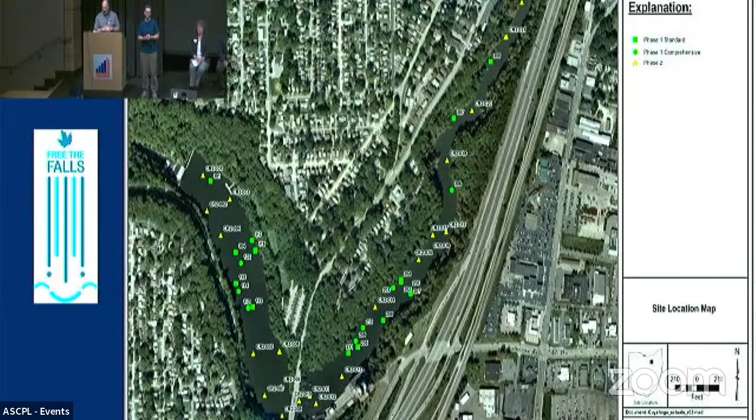So it allowed us to now think and partner with US EPA. In 2015, Ohio EPA was able to fund our first study, and for some folks, we had our really first serious meeting in 2015 talking about this as a possibility. And we came up with a cost at that time, I believe it was $77 million we thought it would be. We had a meeting, and as time has gone on, obviously those things have changed. But we continued forward because we had both P's: we had patience and we had these partnerships building up.

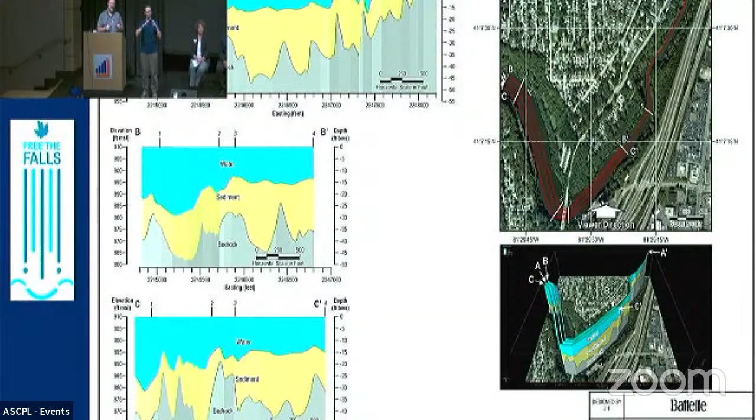As we moved forward, we started asking very seriously, how do we achieve these things? So last year, we were able to go to the US EPA office in Chicago and make our pitch: hey, we got a cool project here.

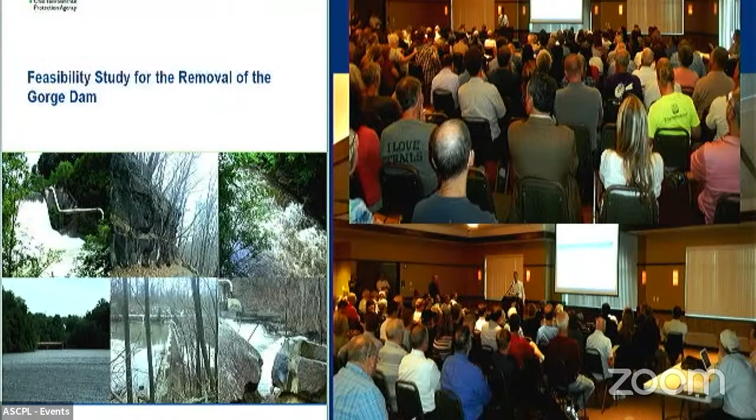How much do you really want to partner with it? We did an application, it was reviewed, and where we are is our partners. We want to make sure we understand that none of this is possible without a common vision, which is: let's invest in the river and make it better, restore that river. For that, the city of Cuyahoga Falls, the city of Akron, Friends of the Crooked River, and Gary Whidden were at the very beginning of asking this when it was still something that most folks would call a pipe dream, along with Summit County Metro Parks, the County of Summit, the Lake Erie Commission, and Lynn Garrity.

Without her emotional support, I think I would have buckled years ago.

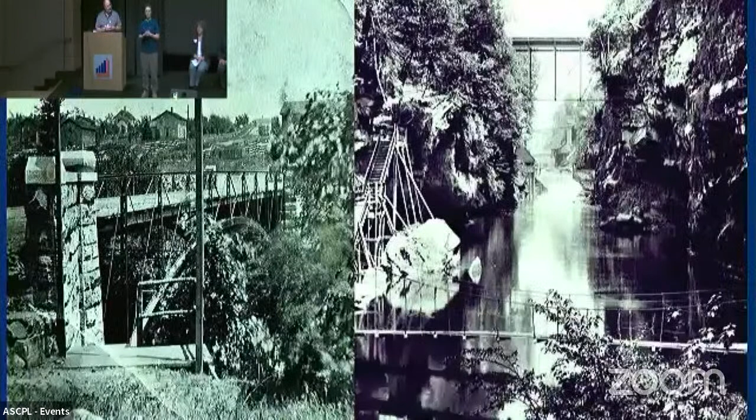Ohio EPA, the state of Ohio, FirstEnergy, the Regional Sewer District, and the US EPA — without this collective partnership, nothing would be possible to move forward. So with that common vision and investment, it is my honor to say, as of right now, we have a signed project agreement, and this project is able to move forward. Our partners have come together and funded it.

I'm wearing my When Pigs Fly socks because Steve Tuckerman and Bob Wyszynski, the folks who mentored me, that would have been their answer had we asked this question 30 years ago.

It is amazing to think of the work that has been done, and even more amazing to think of the work that will be done, and all the support folks have given us to encourage this project to move forward, to restore the Cuyahoga River to what was once the most visited natural area in the state of Ohio. With that, I am going to introduce Mayor Horrigan, who's going to give some additional remarks.

The name Bill Zawiski lives in memory for a lot of reasons, and for a good reason too, because early on, and not to give you a history lesson, but as we've had these — go ahead. That's twice, it's okay. I think I can pick back up.

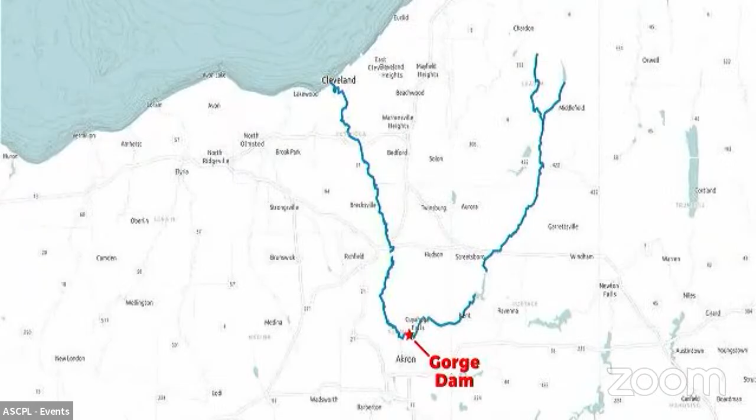Flowing southwest from its headwaters in Geauga County, the river encounters a large deposit of bedrock in Cuyahoga Falls, forcing it to make a sharp U-turn before finishing its journey to Lake Erie. With rocky outcrops, caves, and dramatic scenery, the area where the river turns towards the north has attracted visitors for more than 150 years. Outdoor enthusiasts once flocked to the gorge to view the big falls of the Cuyahoga and to enjoy the amusement park rides, dance halls, picnicking, and more. That tradition continues today at the 155-acre Gorge Metro Park.

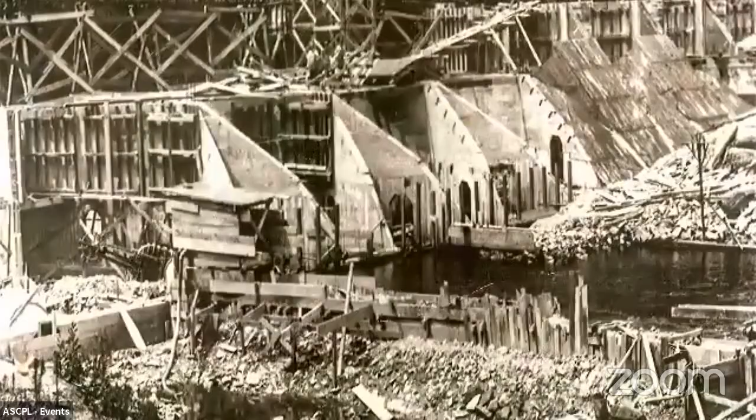But over the years, the river has faced serious challenges. In 1911, the massive Gorge Dam was built to support electricity generation for streetcars and city lights. Its construction put the famous Big Falls underwater and forever altered the landscape of the gorge.

In the 1950s, the Cuyahoga had become a virtual sewer. As the region industrialized, the river became extremely polluted. Like other rivers around the country, the Cuyahoga between Akron and Cleveland became a convenient dumping ground for raw sewage, industrial waste, toxins, and polluted runoff. Thanks to the Federal Clean Water Act and the entire Cuyahoga River community, the river has largely recovered from its polluted past. But the Gorge Dam remains.

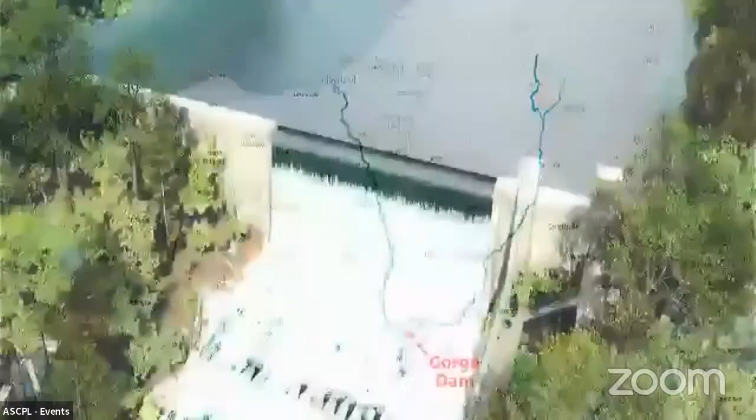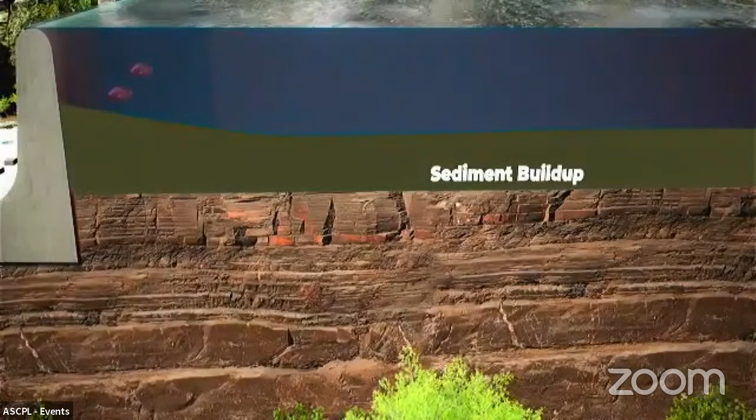Today, the 58-foot-high, 425-foot-wide remnant of the past serves no useful purpose. In fact, the dam is the only thing standing in the way of a completely free-flowing Cuyahoga River from Kent to Lake Erie. Even though dams were built with good intentions, they cause a lot of problems for water quality. In addition to preventing fish from traveling freely, dams affect the dissolved oxygen, flow, and temperature of the river. They also reduce habitat, trap and concentrate sediments and toxins, and alter the food web of the dam pool.

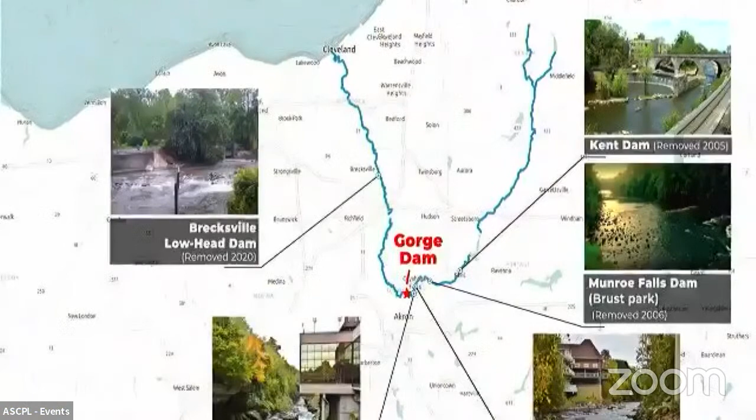Five other dams have already been removed on the Cuyahoga, resulting in nearly 10 miles of restored river. And what's good for the fish is also good for the people. These projects helped improve quality of life and drive economic development along the riverfronts in these communities over the past 10 years. That's why a large group of community partners have joined forces to free the falls at Gorge Metro Park.

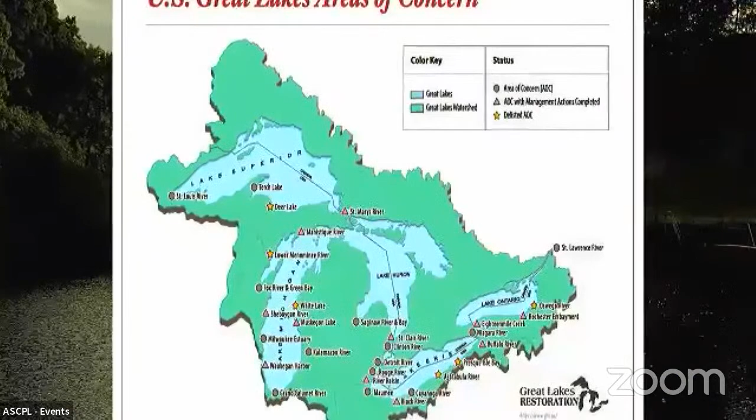US EPA intends to fund the majority of the project through the Great Lakes Restoration Initiative, and non-federal funds will also be required. A funding plan for sediment remediation, construction of the sediment disposal site, dam removal, and restoration of the dam pool is in progress.

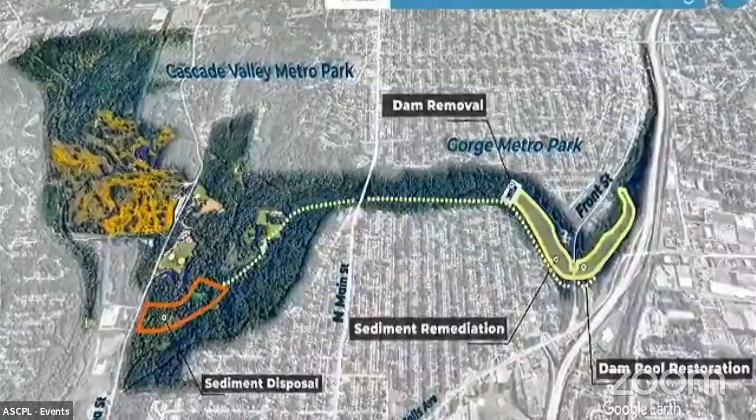Meanwhile, the City of Akron's ongoing sewer system upgrade requires construction work in the same area. While both projects are being carefully planned and coordinated to minimize disruptions to the public, there will be park and trail closures over the next several years. Although the result will be worth it, taking down a dam this big isn't easy. So how will we do it?

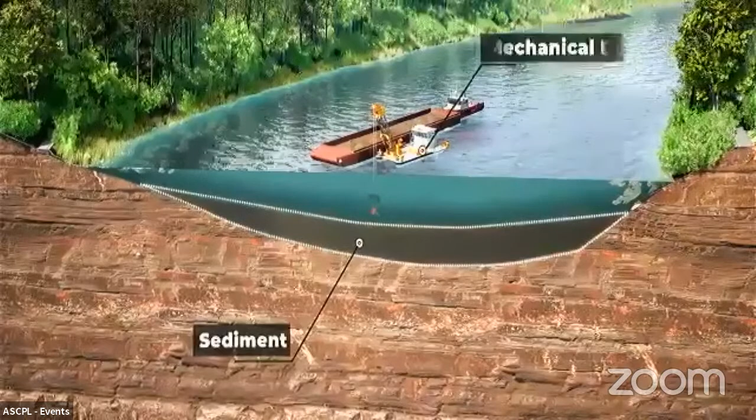First, nearly 1 million cubic yards of sediment must be removed from behind the dam. The sediment has been collecting for 100 years and contains pollutants consistent with the area's industrial past. A mechanical dredge system consisting of a clamshell bucket, crane, and scow barge will troll the reservoir, slowly removing sediment scoop by scoop. This work will likely be completed over 2 construction seasons.

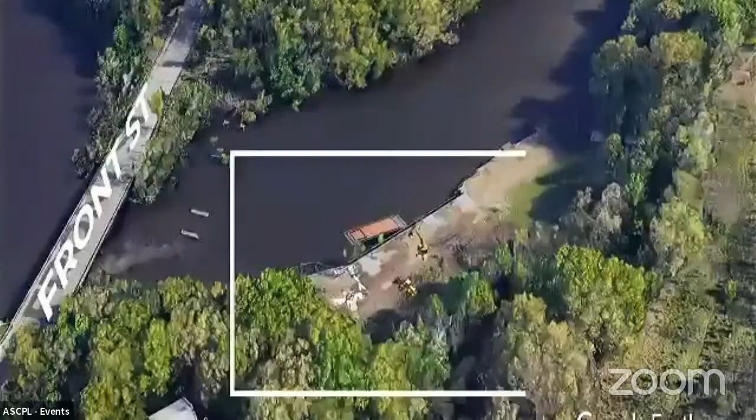Each full scow barge will then be unloaded at a staging area where it will be screened to remove any large debris. The still wet sediment will then be pumped through a temporary pipeline under the Front Street Bridge and then alongside High Bridge Trail. It will continue under the high-level bridge at North Main Street to the Chuckery area of Cascade Valley Metro Park, about 2 miles from the dam.

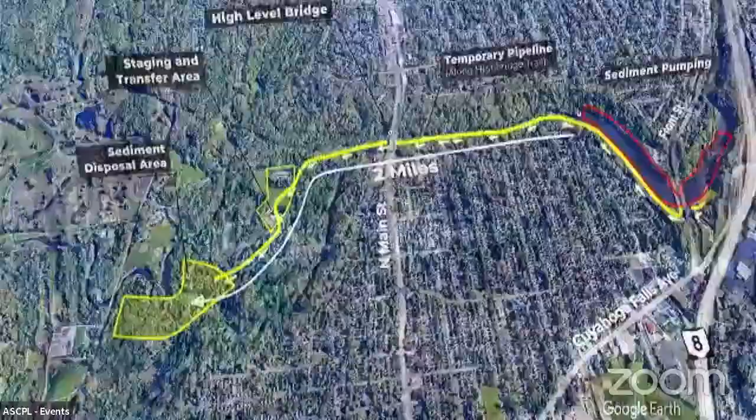The Chuckery area was historically a dumping site and will be utilized as the permanent disposal area for the contaminated sediment. To make room to store the sediment and concrete mixture, trees must be removed from a portion of the Chuckery area. The sediment is mixed with concrete in the pipeline to form a more solid material that can be contoured before it is fully stabilized.

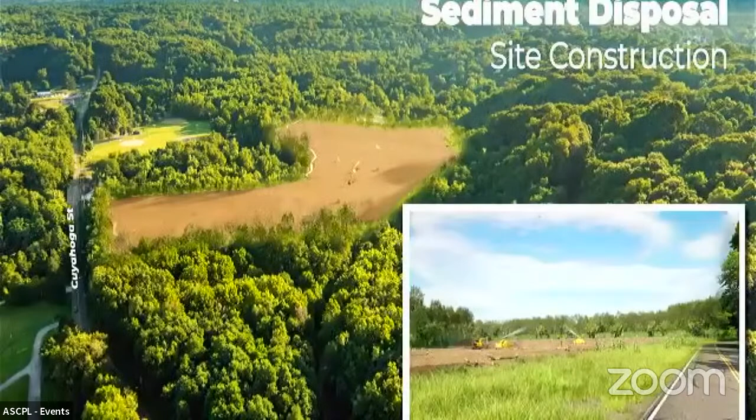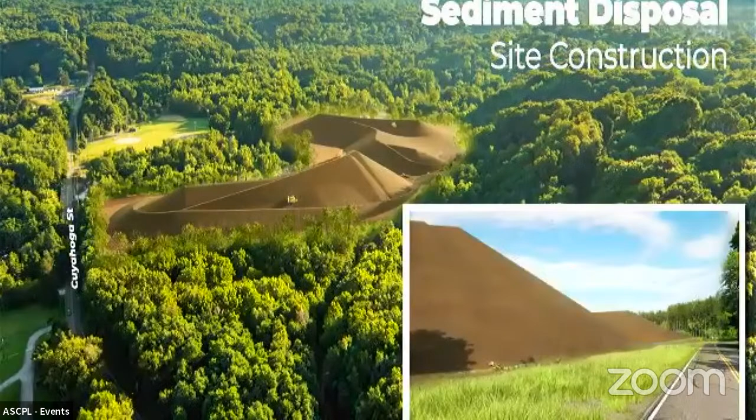This is an innovative and safe approach that has been used at sites across the country. The disposal area is designed to ensure permanent stabilization of the sediment mounds, minimize impacts to buried utilities, and appropriately manage stormwater.

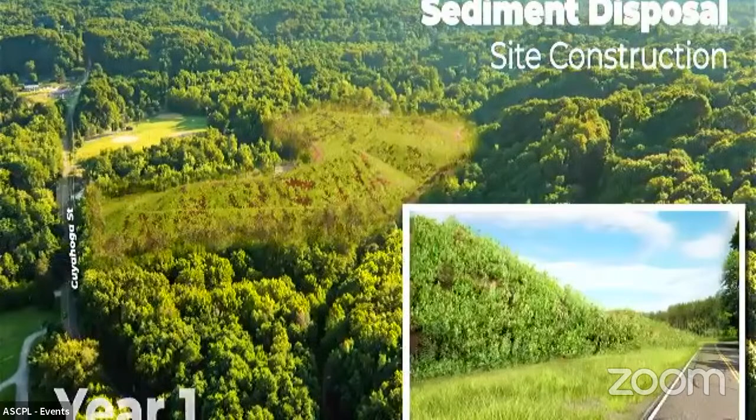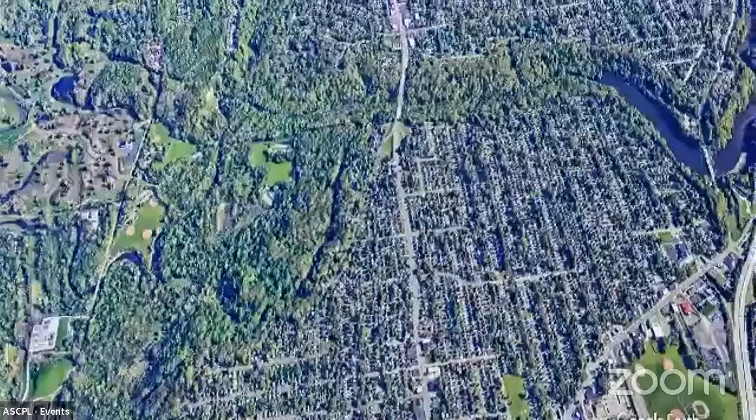After final grading is complete, the sediment mounds will be capped with soil and the area will be planted with a native mix of trees and vegetation, and contoured to look as natural as possible. Within about 10 years, the final conditions will result in a biodiverse habitat that will complement the natural beauty of Cascade Valley Metro Park. Next, the dam itself will be removed.

The water level of the reservoir will slowly drop as the dam is dismantled. The dam will be deconstructed using a barge-mounted excavator. To lessen the impacts to the area and to reduce costs, it may be possible to remove only the center spillway and exposed piping of the dam.

If left intact, the remaining sections of the dam could then serve as a cultural resource and potentially be repurposed as a river overlook for park visitors.

The final step of this project will be to restore the river corridor to its natural state with a rocky channel and vegetation that will promote a healthy river ecosystem.

Restoring the original grandeur of the gorge is our region's path to a vibrant future for the health of the river, its watershed, and its people. That future will bring clean water, natural beauty, recreational opportunities, educational experiences, and economic development.

This project has national significance and is supported by more than 50 agencies, businesses, and civic organizations, as well as the public. Dam removal is critical to restoring the Cuyahoga River and completing a recovery decades in the making. From our industrial roots flows a new future, one that carries Summit County forward while honoring our rich history. The result will be a healthy, free-flowing Cuyahoga River for all to enjoy.

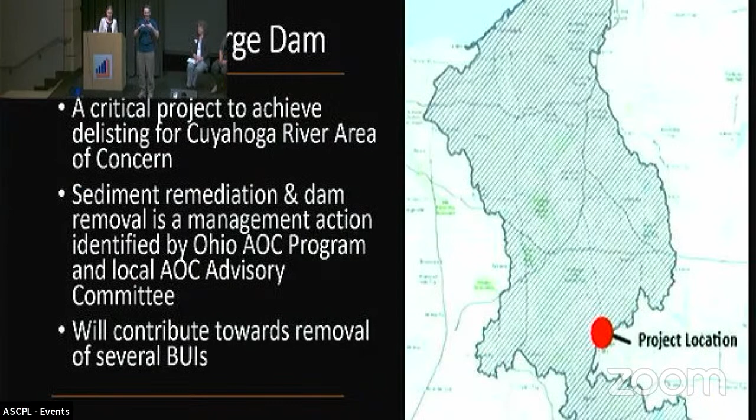I'll go over the remedial approach and then cover some additional work that's happening on the site within the next few months. Some exciting news: there's actually groundbreaking regarding the project within the next upcoming months. And of course, I'll highlight project partners, because we wouldn't be here today if it wasn't for everybody. Then I'll touch a little bit on a tentative schedule looking forward and when we can expect this project implementation to begin.

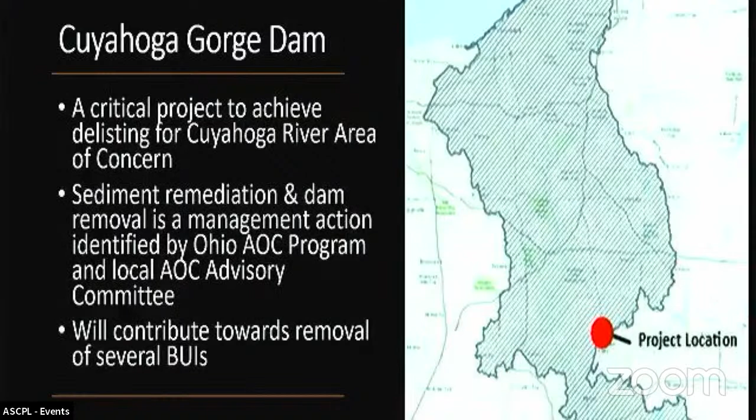So this project, the gorge dam removal as well as the sediment remediation piece, was chosen as critical by the Ohio AOC program and the local AOC advisory committee. These projects together will address several beneficial use impairments that have been determined as impaired within the area of concern, and addressing those impairments will ultimately lead to delisting the area of concern.

So that's how this project falls within the area of concern for Cuyahoga. Now, why do we have to remove the sediment? There's a lot of sediment here, close to 900,000 cubic yards, as Bill mentioned. We aren't able to just remove the dam and let all of that sediment flush downstream. So either way, regardless of the contaminant levels within the sediment, we'd have to figure out where to put this.

But because of sediment characterization and sampling that has occurred previously, we've determined there are some contaminants within the dam pool itself. When I say dam pool, that's essentially about 1.5 miles upstream of the gorge dam. You can see in that figure, and I have another one that shows the footprint better, that within that dam pool the sediment thickness varies anywhere between 1 to 34 feet. So there's a lot of sediment there that needs to be removed.

And within that sediment there's PCBs, PAHs, oil and grease, and heavy metals, but at low levels. Something that Bill had mentioned, he called it the 'ick' within the material.

I want to emphasize this because it's important. The contaminants are at a level where we need to address them, dispose of them, and handle them appropriately to remove human health risk as well as risk to fish and wildlife populations. But the good news is they're not at as high a level where it's necessary to categorize them as hazardous waste or waste that needs to be treated under TSCA or RCRA, which are regulatory programs. So it's dirty enough or icky enough material that we need to dispose of and handle it properly, but not icky enough to be categorized as regulatory or hazardous.

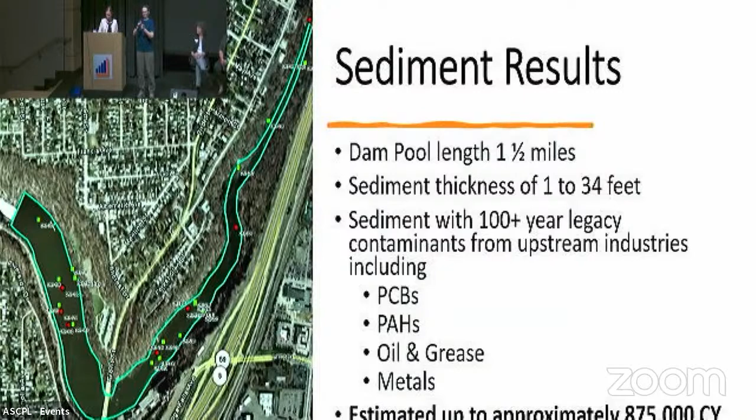The video did a great job walking through all of this, but I'll go through it again. This is showing the remedial action footprint, and there are some key components on this figure I'm going to point out. The main point is this shows where we're taking that dredged material and where we're placing it.

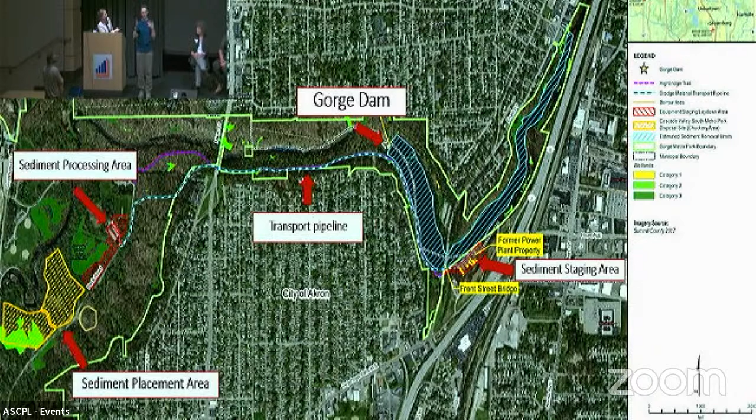So the dam pool itself, this is where the dredging is going to occur, is that area in light blue, 1.5 miles upstream of the dam itself.

As shown in the video, this is going to be mechanically dredged. There's essentially a clamshell bucket that's going to go in, get lowered, and bucket by bucket that material will be removed, placed on a barge, and that barge will go to the sediment staging area, outlined in red here, where the former power plant used to be. From the barge, the material will be removed, placed in the sediment staging area, the larger debris will be screened, and the dredge material will then go into temporary pipelines.

The pipes themselves are about 8 inches in diameter. There will be 3 of them, 2 active and 1 on standby. As the video mentioned, the pipeline route is going to go from that sediment staging area under Front Street Bridge, along the Highbridge Trail. You can follow the dotted light blue lines across, approximately 2 miles that these pipelines will run. There will be booster pumps in between to help keep that dredge material moving until it gets near Peck Road, where the Cascade Valley Park and the Chuckery area lead to the sediment processing area.

In the next slide, I'm going to go into a bit more detail on what happens there. But from the sediment processing area, the now-stabilized dredge material gets placed within the sediment placement area, which is the area outlined in orange.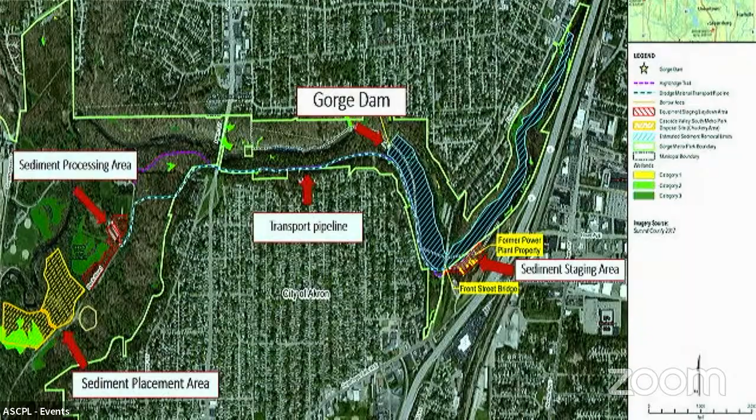This figure is showing just another example of the aerial image from before. We have the Gorge Dam pool, and then we have the barge. The material gets placed up there by the sediment staging area, or the former power plant, and gets placed into this large shaker, where the larger debris is removed. Large debris is then transported to a predetermined, designated landfill.

This is the pipeline route along the High Bridge Trail, and this is the sediment processing area, the label that was in red on the previous slide. I want to talk about that for a minute because it really is a key part of what makes this remedial approach exciting — it's a new technology being used for the Great Lakes Legacy Act program.

It's not new worldwide, it's been used for other projects, but it's new to our program. The benefits, and why this alternative approach was chosen over others, is because of the limited space we have within the Chuckery area. So I can jump to this slide to give a sense of the area we're working with.

This is the sediment process, or sediment placement, area. This is where the dredge material is going to get placed. Given the location, we have a Category 3 wetland to the top, there's a river, a road, and another road. So we're really limited on space.

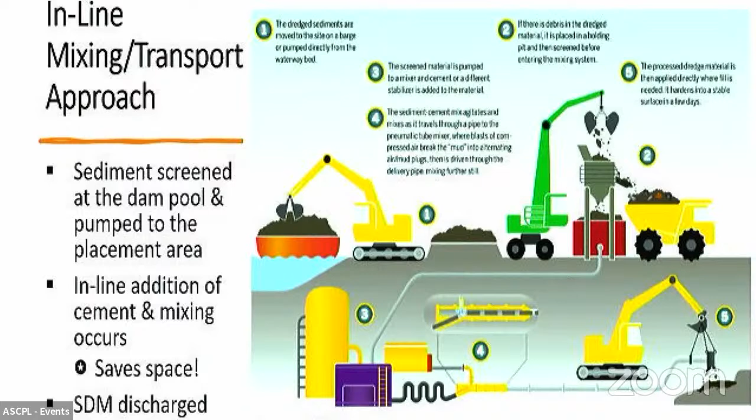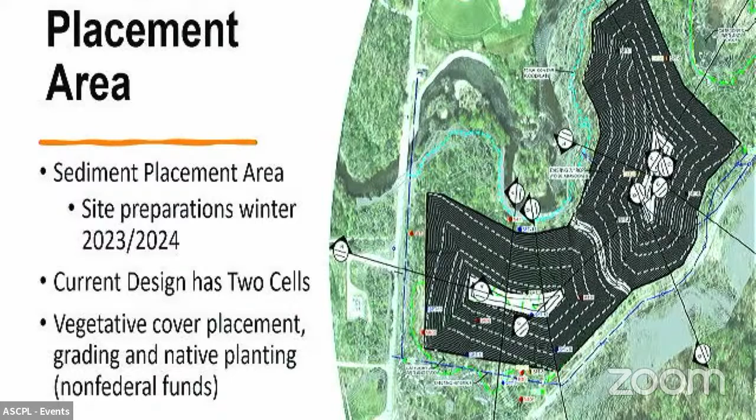If you take anything away from this, it's that the stabilization solidification system saves space, and that's why the remedial approach was chosen. As mentioned, this is the sediment placement area. I'll cover it more on the next slide, but there are a few projects occurring in the next few months, and this is the location where one of them will occur. Preparations should begin this winter, 2023 and 2024, to prepare the sediment placement area for the construction contractors once they get on the ground, hopefully spring or summer of next year. That space will be ready for material to be placed there.

Right now it's a two-cell design, and around the perimeter there are stormwater ditches, plus one running through the middle. As the video showed, the cover of the sediment placement area itself will use native material. A native seed mixture will be planted on top, and it'll be contoured so it looks similar to the nearby habitat as well.

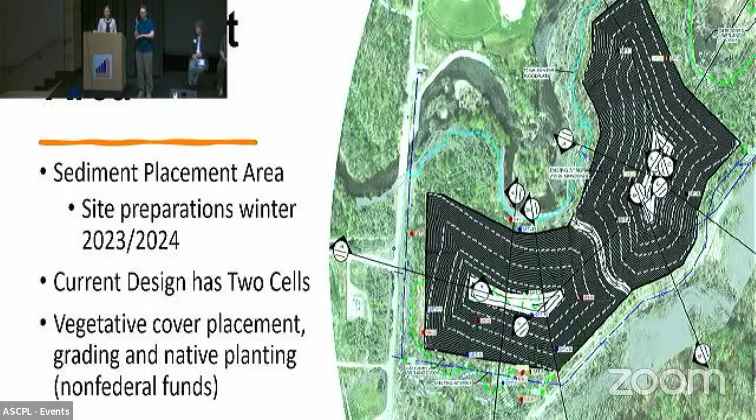Those additional projects I mentioned: the sediment placement area — the City of Akron, with funding from Ohio EPA, is going to begin work this winter, 2023 and 2024, to prepare that site.

In addition, this might be an area you'll be able to see from Front Street Bridge — the former power plant space, which will be the future sediment staging area. If you go past Front Street Bridge now, you can see a lot of metal left over, remnants of the power plant itself, including sheet pile wall. All of that isn't stable enough for the dredging contractors to work on, or for us to have that staging area in place.

So there's going to be work occurring again over 2023 and 2024 so that it's ready to go come spring and summer when the remedial action contractors are on board. It'll be complete, and that is also being led by the City of Akron through Great Lakes Restoration Initiative funding.

Also something you might notice from Front Street Bridge: tree clearing is taking place just to the west of the outfall from Front Street Bridge. The reason for this is because the construction contractors are going to need access to the dam pool upstream of the dam, and a lot of their equipment is too tall to go under the bridge.

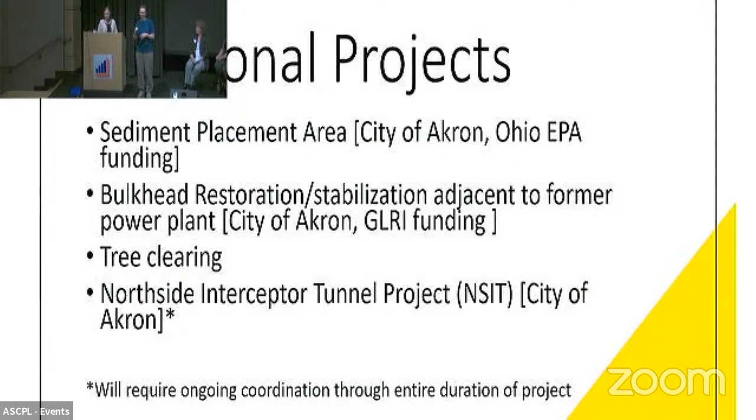Another huge project that is occurring, and we are sharing the same footprint, is the Northside Interceptor Tunnel project. The City of Akron and US EPA will be working very closely the next two years as we share that space.

I know there's been a lot of talk tonight about partnerships, and I know that probably seems like it's said a lot, but just looking at a project of this size, not only with the volumes that need to be removed, but the money that's needed to do it, this really wouldn't be possible without these partnerships. I just want to give a big hats off to a lot of the folks that have been working on this for a long time to get it to this point. It takes a lot of phone calls, a lot of meetings to have this list of folks. Just want to emphasize that it takes a lot of work, and I'm really happy to be a part of this great community and partners working on the Gorge.

So the difference is: there are the non-federal sponsors. We have Ohio EPA, City of Akron, Northeast Ohio Regional Sewer District, and the FirstEnergy Ohio Edison Company. These are the non-federal sponsors, the signatories of that project agreement that we're celebrating today. Within that project agreement, they have cash and in-kind contributions that they are committing to for this project.

In addition to that, there are also cost share partners. We have Ohio Lake Erie Commission, Summit Metro Parks, City of Cuyahoga Falls, as well as Summit County. All of these partners have also contributed cash and in-kind services to get this project done.

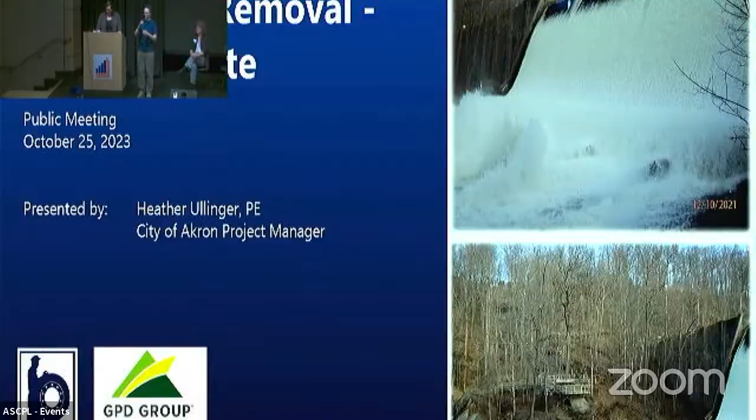How close do I need to be to the microphone? Okay, I am not used to talking with the microphone.

So my presentation tonight, I'm going to go through a design update, including information on access and staging, the dam removal itself, and then stabilization of infrastructure in the dam pool. By infrastructure, we mean Front Street Bridge, and our next steps for the project, and then a quick mention of the Northside Interceptor Tunnel project. You may have seen my posters out in the lobby, so I just wanted to make a quick mention of how that project interacts with this one.

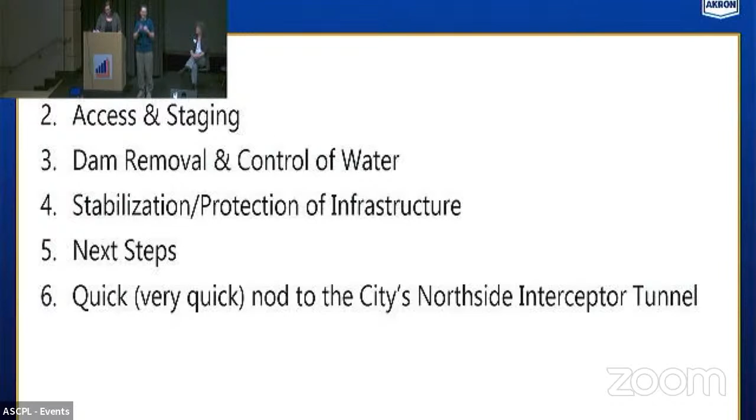So our design actually includes removal of the concrete structure. And like I said, we're also looking at stability of infrastructure within the dam pool. So we're looking at Front Street Bridge, we're looking at storm outfalls and what happens as the water level is lowered. At the end of our design, we'll also be looking at river restoration, what needs to happen to the river, if anything, once the dam is down and once the water level's lowered.

Our project team is led by GPD Group with assistance from AECOM and GEI Consultants. Our funding is through US EPA's Great Lakes Restoration Initiative program. So right now we're at 50% design. In the coming months, we'll be moving to 90% design. So the slides that I'm showing tonight are based on the 50% design. That means that it's not necessarily final and that things could still change.

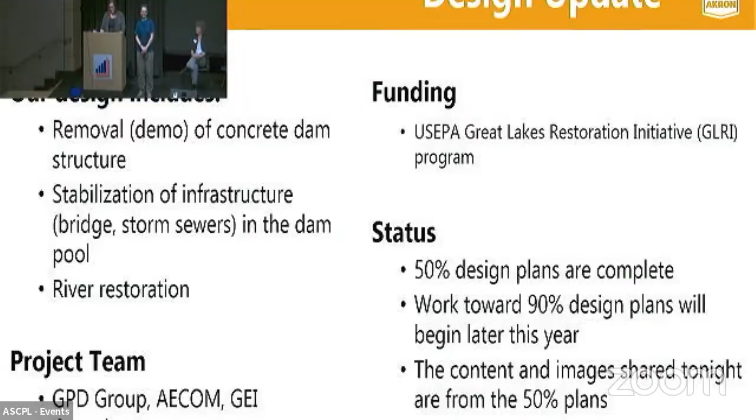So starting off with one of the most challenging aspects of our project is access. We need to be able to get from Front Street to the dam. And you'll see a lot of green areas - those are our proposed staging areas. The reason that we have so many is because as we lower the water level, we'll be changing the whole site. We'll be gaining land and we'll be reducing the amount of water, so we need access on both sides of the river.

We need access through the river. Starting on the north side of this figure, Gorge Metro Park main parking lot is one of our main access areas. We'll be using the lower Gorge Trail, widening it slightly so we can get trucks and construction equipment to the north side of the dam.

We'll also be using the Highbridge Trail parking lot, which will be our barge access. We'll be going in using barges from the Highbridge Trail through the dam pool to get down to the dam. On the south side of the river, we'll be using the Highbridge Trail parking lot and the Highbridge Trail, shown in purple, to get down to the south side of the dam.

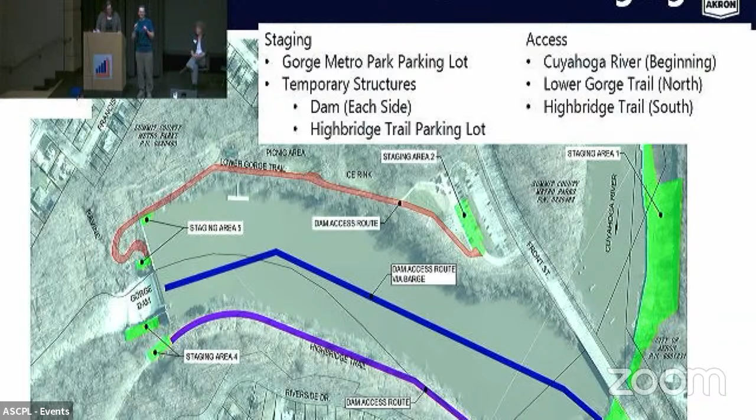At the Highbridge Trailhead, the parking lot is pretty small, so since we have to launch barges from there, we'll be improving and expanding that parking lot so we can launch barges from there. We'll also be using that site to unload the barges and load the debris or supplies into trucks to get them out to Front Street Bridge.

This area will be removed after construction, so this is a temporary build-out just for our use during construction. One benefit of using this site is that it's downstream of Front Street Bridge, so we don't have to worry about the clearance issue under Front Street Bridge.

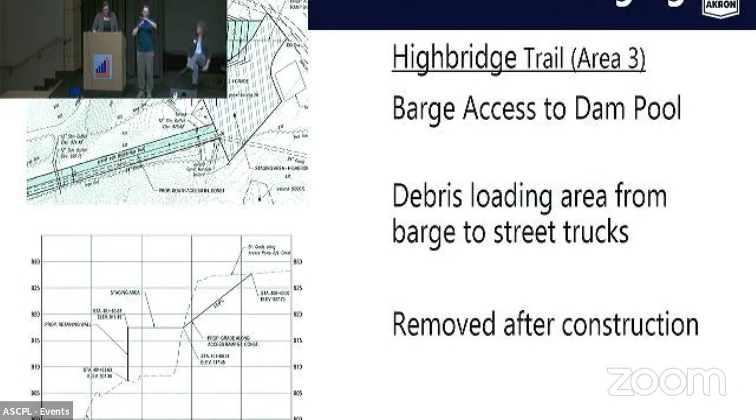Our staging area on the north side that we're going to be building out is just off of the lower Gorge Trail. We're going to be using this site for a crane setup, and also as a turnaround area for trucks or construction equipment so they don't have to back down the very long trail to get out to the parking lot — that's not very safe. This area will also be removed after construction and restored.

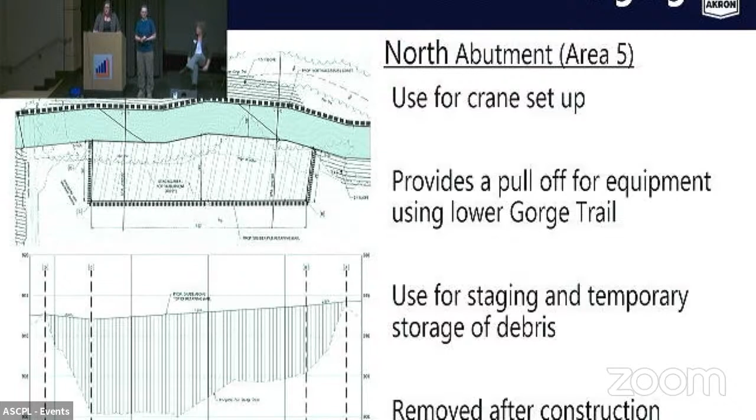So how will we actually remove the dam? We have a lot of things to consider because we live in Ohio, and we have wet weather, like in April, and dry weather, like in July. These variations we have to plan for in our design.

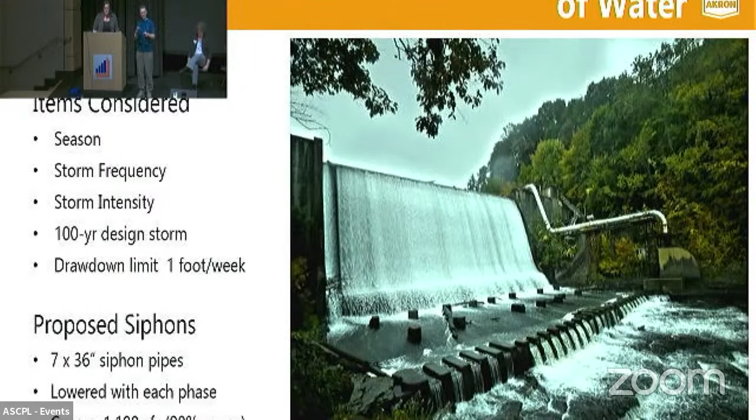The other thing we have to accommodate is that ODNR is requiring us to meet a drawdown limit of 1 foot per week, so we can only lower the water level 1 foot per week. This is something we have to consider as well, and what we've come up with is using siphons to lower the water level.

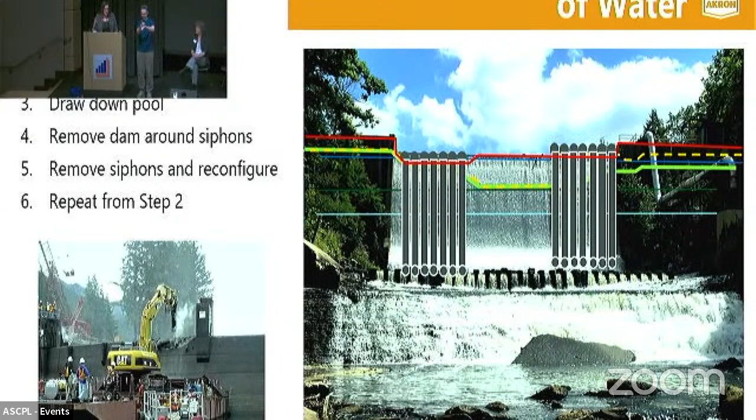This figure shows the siphons — I won't explain what the different colors are, but we'll be using a mix of notching. We'll notch the dam, place the siphons, remove that portion of the dam, then replace the siphons and notch again, going through that sequence 4 times. There's a 5th part of the sequence that doesn't require siphons: when the dam is low enough, we'll just remove the remaining dam structure as is, accessing it from the riverbed.

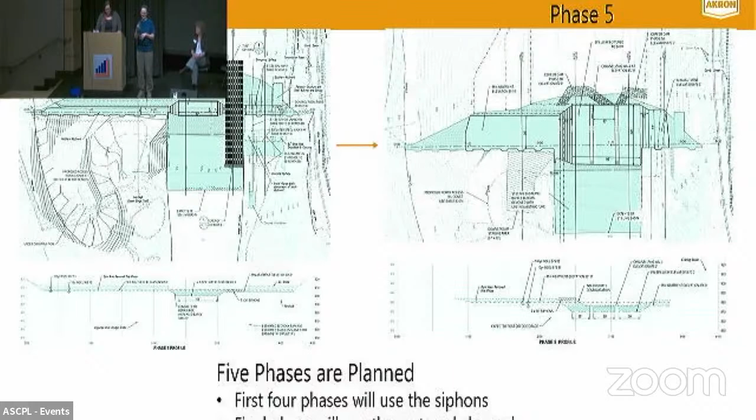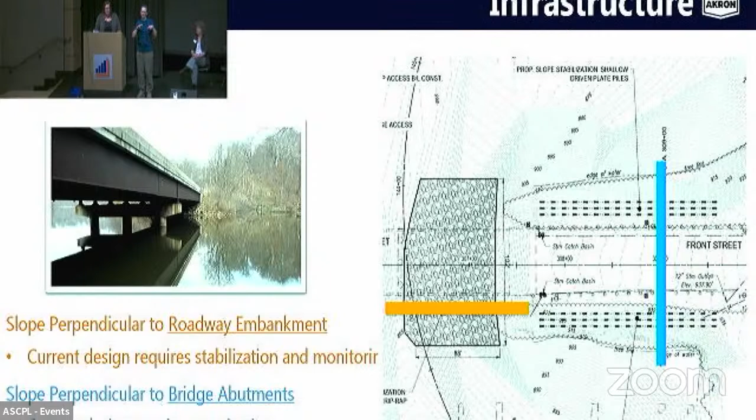I mentioned Front Street Bridge earlier, so we're looking at the bridge and the stability of the roadway that goes across it. Right now we know the north side of the road needs to be stable, so we're looking at what that means and how it can be implemented. We'll definitely be monitoring the roadway and the bridge during construction.

Other considerations in the dam pool are the stormwater outfalls — the pipes bringing rainwater down into the dam pool. Right now they're very high, and when our water surface goes down 40 feet, we need to make sure the riverbank is stable and that we're not causing erosion near Front Street Bridge. So we're looking at whether we need to stabilize the riverbank or lower the pipe.

We've also been working with US EPA's design team on the former power plant site, as Courtney mentioned. This has been a collaboration between the different construction projects to figure out who's going to do what, to make sure this site is stable as we remove all the sediment around it and lower the water level.

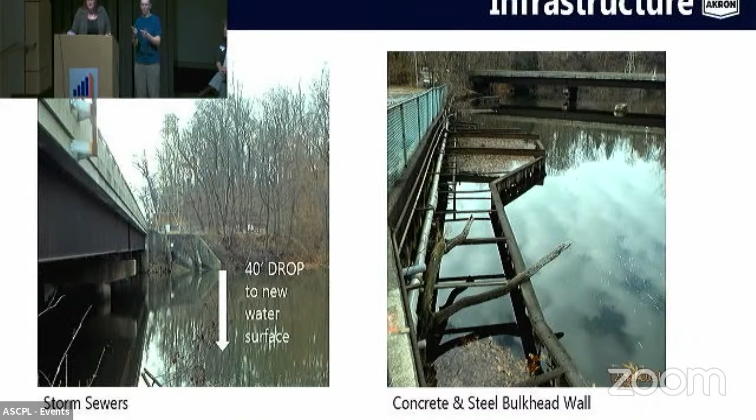So our next steps: we obviously need to complete our design. We will use that completed design to apply for construction funding for the dam removal project, and then we will begin construction, hopefully in 2026. Courtney and I were on the same page with the year.

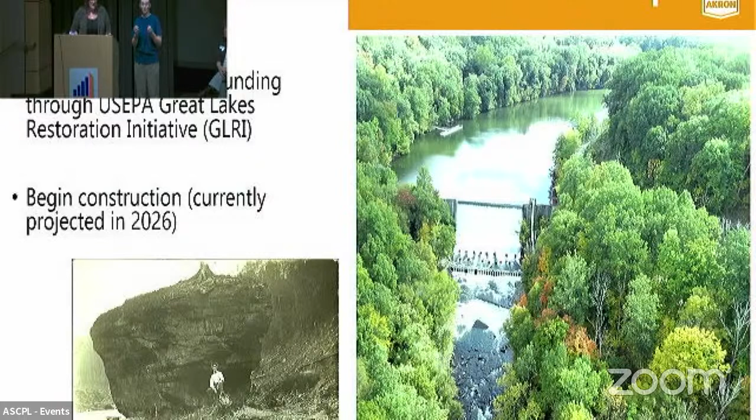As I said, I wanted to mention the Northside Interceptor Tunnel project. This is part of our Akron Waterways Renewed program to reduce combined sewer overflows to the Cuyahoga River. We're obviously improving water quality with this project as well. We talk about them together because they share a project area, a schedule, and lots of meetings and coordination to make sure that we're sharing our space.

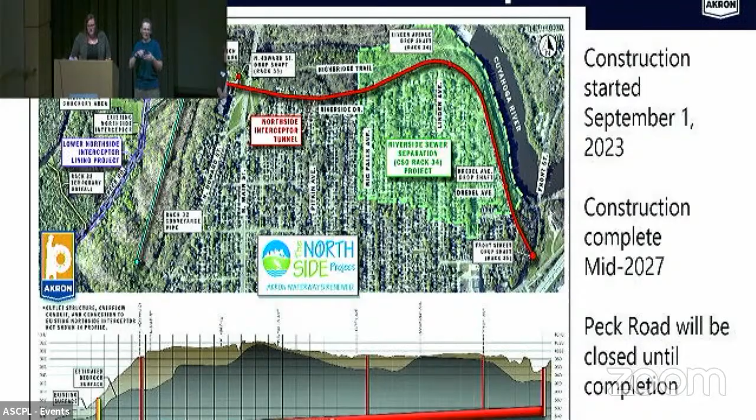So I have more information, and I have some posters out in the lobby. If you have any questions about the tunnel project, I would be glad to answer them out in the lobby after the meeting. We also have a good website, akronwaterwaysrenewed.com, that has a lot of good information about our Akron Waterways Renewed program. So that's it for me. Thank you very much, and I'm going to turn it over to Lisa for questions.